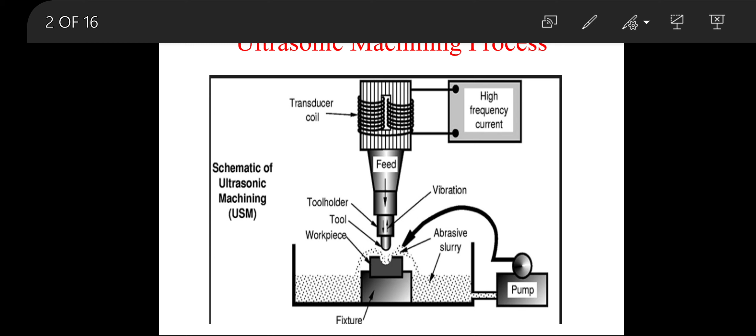Now, we'll discuss about the principle of ultrasonic machining process. The basic USM process involves a tool vibrating with a low amplitude and very high frequency and a continuous flow of an abrasive slurry in the small gap between tool and workpiece. The tool is gradually fed with a uniform force.

The impact of the hard abrasive grains fractures the hard and brittle work surface, resulting in the removal of work material in the form of small wear particles. The tool material being tough and ductile wears out at a much slower rate.

Then we will discuss about the construction details of this ultrasonic machining process. From the diagram, we can see the setup of this ultrasonic machining process. It consists of an electromechanical transducer for producing frequency of 20 kHz to 30 kHz, which is more than the upper limit of audible frequency of the human ear and makes the process silent.

It uses the slurry of small abrasive particles which is forced against the workpiece by using a vibrating tool, and it removes the material of workpiece in the form of small chips. The tool which is applied to the workpiece is generally made up of soft material, and slurry is either fed manually or through the pump. Sometimes hollow tools are also used because the slurry can feed through it easily.

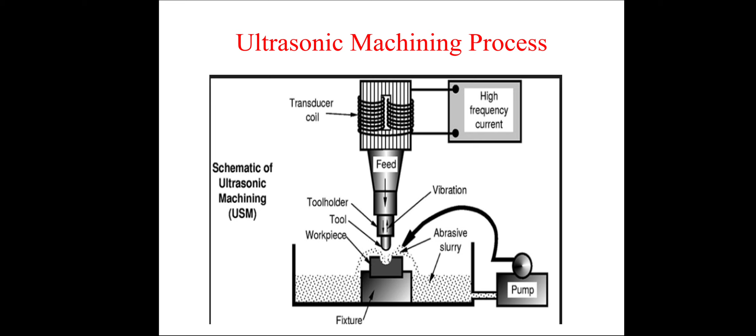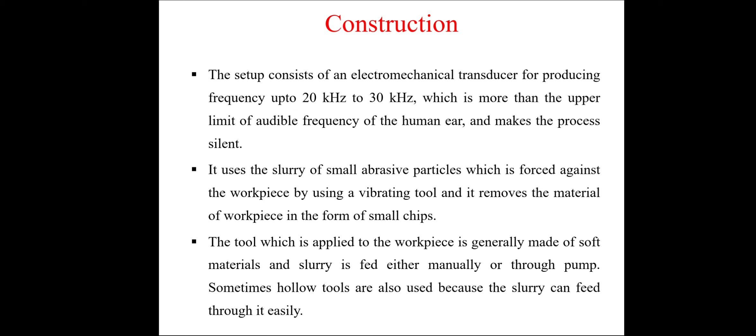These vibrations are transmitted to the cutting tool through the transducer cone, which is connected to the body and tool holder. The shape of the cutting tool is the mirror image of that which is produced on the workpiece surface. This one is the principle we already discussed. This is the construction details, and this is the working of the process which we already discussed.

Next point is specification. In that case, the first one is abrasive slurry. The most common abrasives are boron carbide, silicon carbide, corundum, or we can also call it aluminum oxide, diamond, and boron silicarbide. Aluminum oxide is the best for cutting glass and ceramics, but it wears fast.

Boron carbide is the most expensive abrasive material but suitable for cutting tungsten carbide and tool steel, and silicon carbide is difficult to keep in suspension. In some cases, diamond and rubies are nicely cut by using diamond powder, which gives good surface finish.

The size of abrasive particles varies from 200 to 2000 grades. Coarse grades are used for roughing and finer grades are used for finishing. In this case, water is the most commonly used fluid, although other liquids such as benzene, glycerol, and oils are also used.

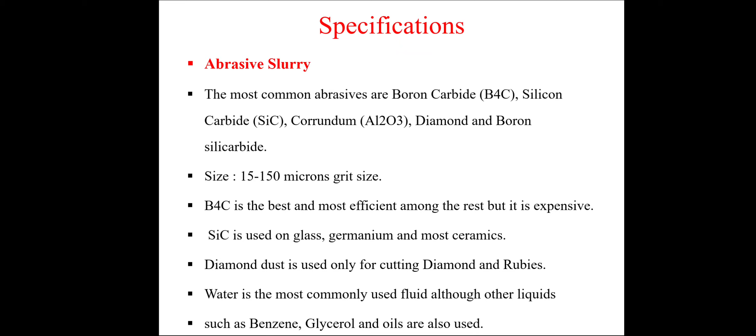Next one is ultrasonic machining tool. The tool is made up of soft ductile material. The tools used may be unhardened steel, copper, brass. It may be brazed or soldered or mechanically fastened to the transducer through the tool holder.

The material used for tool holders are monel metal and titanium. They have almost similar acoustic properties, but titanium can't be brazed. Hence, monel metal is more widely used.

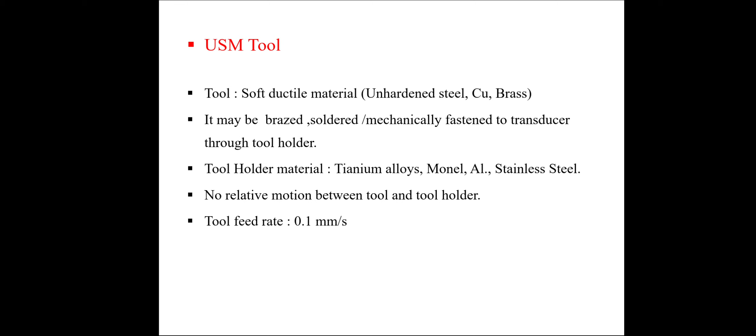In some cases, stainless steel is also used, though it may be cheaper, but it does not have as good acoustic properties as other tool metals, and it also has a low fatigue strength. Its use is therefore limited to low amplitude applications. There is no relative motion between the tool and tool holder. The tool feed rate is 0.1 mm per second.

Next one is the ultrasonic machining transducer. This transducer is used to provide vibration to the tool. The amplitude range is from 10 to 50 microns and the frequency is 20 to 30 kilohertz. Generally, there are two types of transducer.

One is the piezoelectric transducer. We already know that in this type there is a change in length that occurs in certain piezoelectric materials like quartz or lead zirconate titanate when electric current is passed through the material. When the current is removed, the material immediately returns to its original size. When a high frequency supply is given to such a material, mechanical vibrations are produced. But these transducers are available only up to 900 watt power rating.

Therefore, in this process, generally the second type of transducer, that is the magnetostrictive transducer, is used. These increase in length when subjected to a strong magnetic field. When the field is removed, they again come to their original length. This transducer has power capacities up to 2.4 kilowatt.

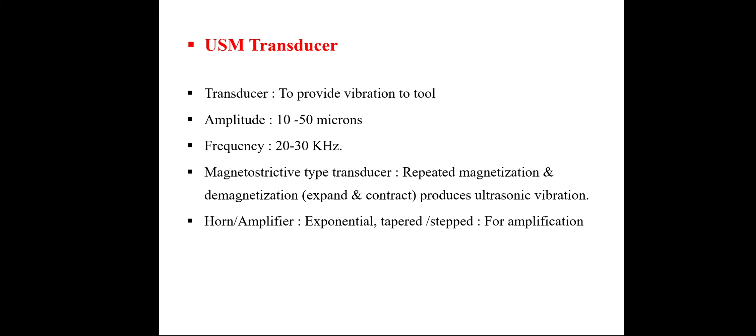Next point is the effect of various parameters on material removal rate. The first one is the frequency. From the graph of frequency versus material removal rate, it is clear that with an increase in frequency of the tool head, the MRR should increase proportionally. However, there is slight variation in the MRR with frequency. Next parameter is amplitude. When the amplitude of the vibration increases, the MRR is expected to increase. The actual nature of variation is shown in the figure.

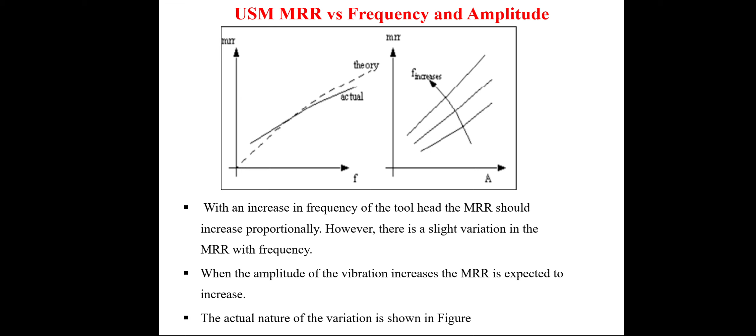Next one is grain diameter and abrasive concentration. The material removal rate should also rise proportionately with the mean grain diameter. When this diameter becomes too large, the crushing tendency increases. Next one is the concentration of the grain or abrasive. The concentration of the abrasive directly controls the number of grains producing impact per cycle.

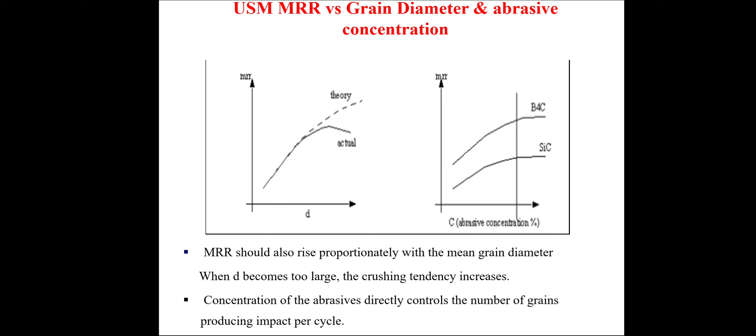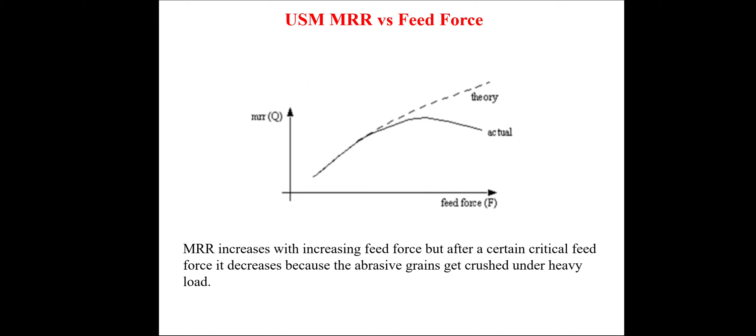Next parameter is feed force. The diagram clearly indicates the MRR increases with increasing feed force, but after a certain critical feed force, it decreases because the abrasive grains get crushed under heavy load. Next parameter is grain size. The figure shows that as the grain size increases, MRR also increases. The diagram shows this for tungsten carbide as well as glass material.

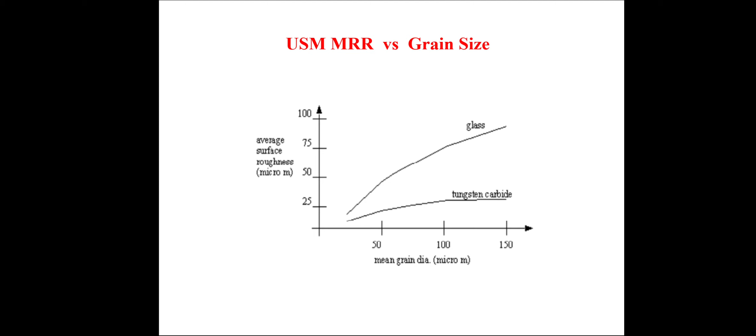The next one is advantages of this USM process. It is generally used for extremely hard materials like carbides, glass, ceramics, tool steel, titanium, quartz, etc. They can be machined with this process. Metal removal cost is low compared to other non-traditional machining processes. The machined component is stress free. Physical properties of the material remain unchanged.

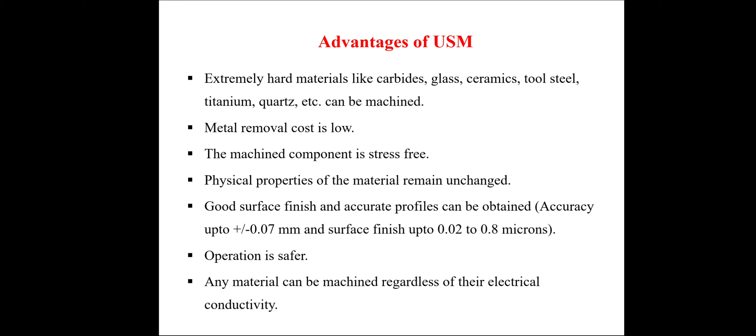Good surface finish and accurate profiles can be obtained with the help of this USM. The accuracy is up to plus or minus 0.07 mm and surface finish is up to 0.02 to 0.8 microns. Operation is safer. Any material can be machined regardless of its electrical conductivity.

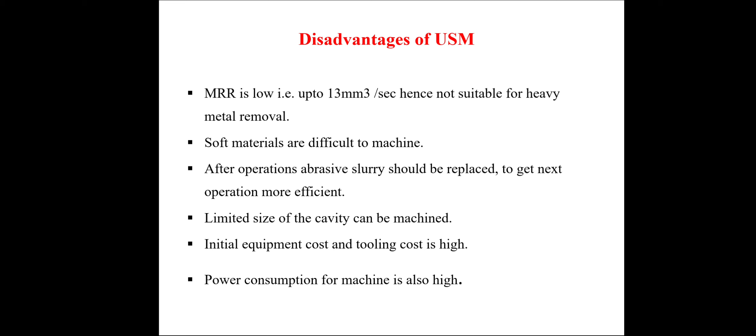This process is also associated with certain disadvantages. MRR is low, that is up to 13 mm cube per second, hence it is not suitable for heavy metal removal. Soft materials are difficult to machine with this USM process. After operations, abrasive slurry should be replaced to make the next operation more efficient. Limited size of cavity can be machined. Initial equipment cost and tooling cost is very high, and the power consumption for this machine is also high.

Next one is the application of USM process. This USM process is mainly used for wire drawing and extrusion dies. Machining of hard materials like tungsten and brittle materials can be easily done. Shapes which are on the cutting tool can be easily produced on the workpiece by this method. It is also used to drill fine holes of required shapes in teeth, that is dentistry work.